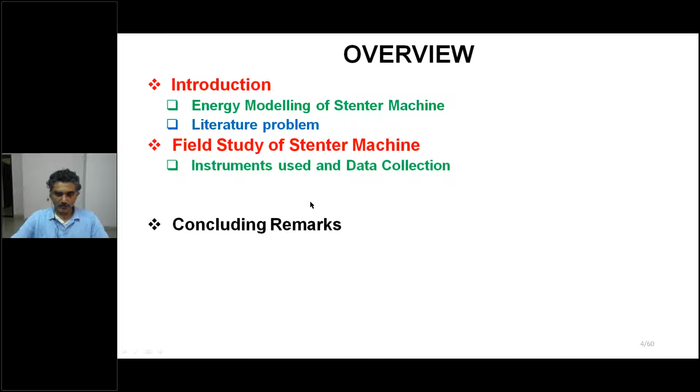Remember here, in the modern era, garments are of one's own preference. Garments is basically not only used as a need, but nowadays it is fashion, and in addition to fashion, it is also a protection in various ways. So garments does not remain just a basic need.

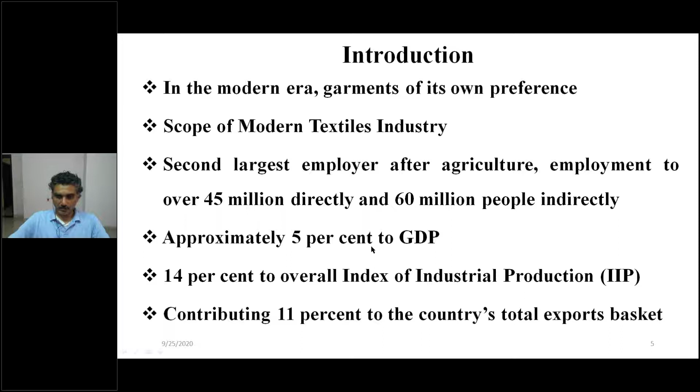Textile industry, if you are talking about as a whole, then in India's concern, it is the second largest employment generation, as well as the second export industry in the world's statistic. So from the economic point of view, also being the second exporter to the world, it is important, as it is said that after agriculture it employs over 45 million directly and 60 million people indirectly, approximately 5% share of GDP, then 14% of the overall index of industrial production, contributing 11% to the country's export.

Surat cluster, if you are talking about, then there are around 450 dyeing and printing units. Drying cost is around 12% of the manufacturing cost.

And if you see the dyeing and printing houses over here, dyeing houses are basically more or less conventional. And being conventional, there are so many issues. To require upgradation requires funding, and being a small scale or medium scale industry, much funding is not available. So there is not much research happening, and upgradation is also not there. And being upgradation is not there, energy consumption is going to be very high.

When we saw these issues, we thought let us try to analyze the energy intensive devices in the textile industry, being that textile industry is an important industry for Surat city as such. Surat is one of the textile clusters in India, basically for man-made fabric.

Man-made fabric is basically manufactured from polymers, which are obtained from crude oil. Ultimately, it is a petroleum product. Then we're going to discuss the energy model based benchmarking for the Stenter.

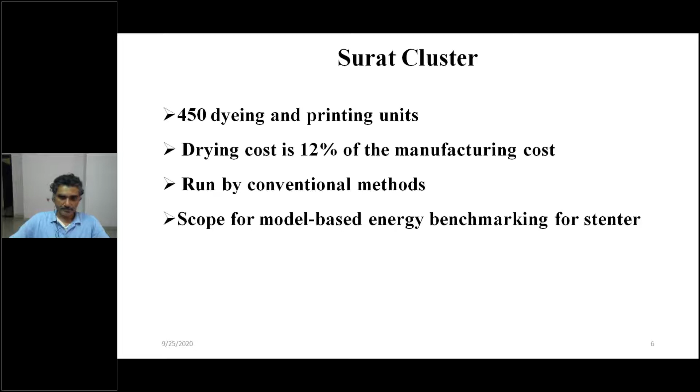Benchmark data available is based on statistical benchmarking in the literature. If you see the data related or given for the Stenter, it is based on the statistical tool. So the drying process, if you are talking about polyester, it varies from 2.5 to 7.5 gigajoule per ton of fabric.

Then heat setting, it is 4 to 9 in the same unit. And drying and heat setting for the Surat cluster is going to be around 0.019 kilowatt hours per meter. So these units are different, and this is basically the average specific energy consumption.

And it is not going to give you the idea whether my Stenter is efficiently working or not, for the particular process, how much amount of energy is really required. If you consider the first case, drying, then energy consumption varies from 2.5 to 7.5. And if the Stenter which I am using in this particular industry has energy consumption of 5 gigajoule per ton, then what can I conclude from it? Whether it is going to be energy efficient, or there is scope for performance improvement, or whatever is going on is according to the best practice I am following. No idea am I going to get from this data, right?

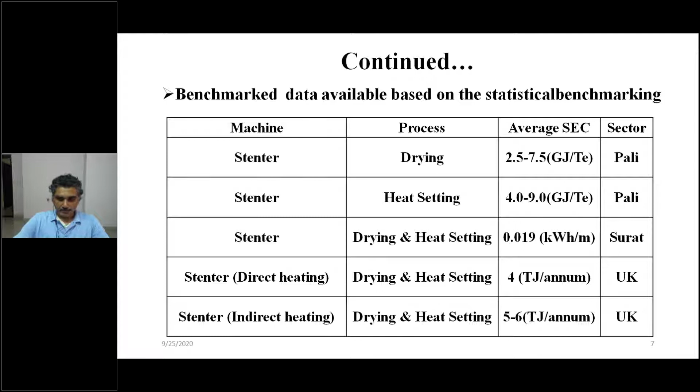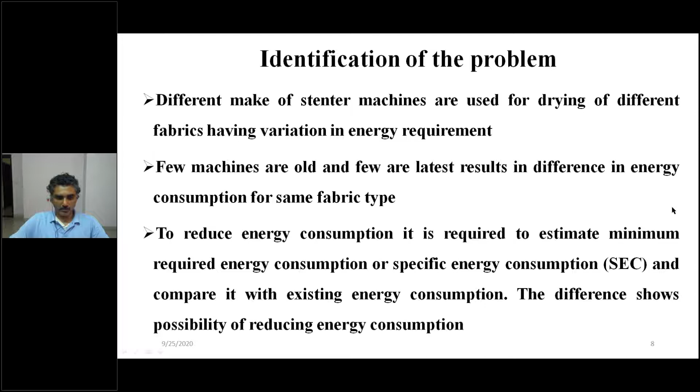So we tried to identify the problems basically in the Stenter machines. Different makes of Stenter machines are used for drying different fabrics, having variation in energy requirement. Few machines are old, few are latest, resulting in differences in energy consumption for the same fabric. To reduce energy consumption, it is required to estimate the minimum required energy consumption, or the specific energy consumption, and compare it with the existing energy consumption. The difference shows the accessibility of the possibility of reducing energy consumption.

Energy input given in the Stenter machine is based on past experience without consideration of the optimal energy requirement to change process and geometric parameters for increase of production or other reasons. Energy optimization is not considered to increase heat transfer to the fabric from the moist hot air, with temperature and fabric speed. Air velocity also plays a key role, so optimization is required.

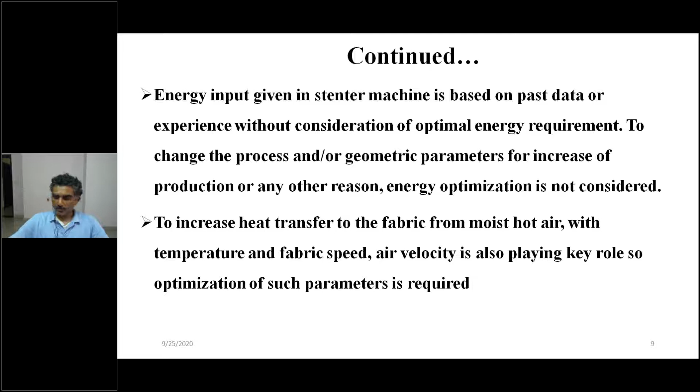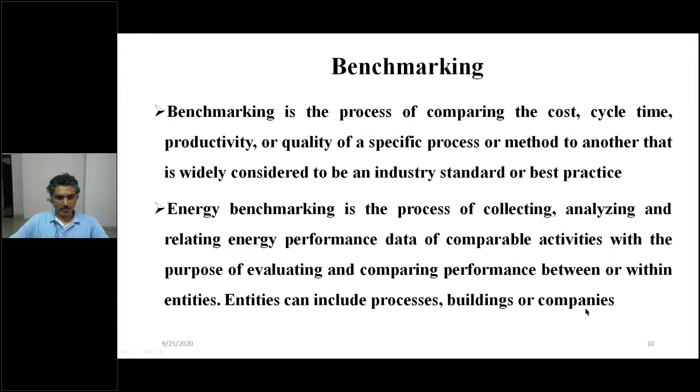We have not addressed all the issues, but we have taken some of them. In this presentation, I am talking mainly on energy model based benchmarking. Energy benchmarking is the process of collecting, analyzing, and relating energy performance data of comparable activities with the purpose of evaluating and comparing performance between or within entities. Entities can include processes, buildings, or companies. This is the broader definition of energy model-based benchmarking.

Energy model-based benchmarking is estimated based on mass and energy balance equations. Remember, the model we are using is based on the laws of thermodynamics, the energy conservation law, and the mass conservation law. Mass conservation law is already something everybody is aware of. Mass is conserved unless there is a nuclear effect. If nuclear effect is not there, then mass is going to be conserved, and similarly energy conservation is also going to happen as per the thermodynamic law.

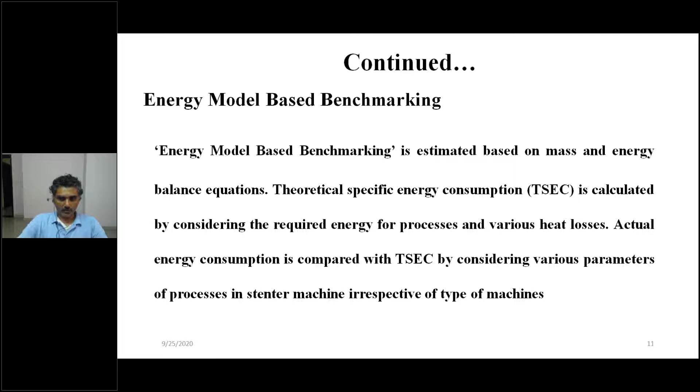Theoretical specific energy consumption is calculated by considering the required energy for the process and various heat losses. Actual energy consumption is compared with the theoretical specific energy consumption by considering various parameters of the process in the Stenter machine, irrespective of the machine.

Before directly going to the Stenter, in this particular case, what I will suggest is I will show you some video related to the Stenter machine, so that you get the idea. Yesterday also you have seen the video, but still I will show it again.

This is the inlet side of the Stenter machine. Hopefully I am audible. Voice is not going to be there as background, so I'm going to tell you the explanation.

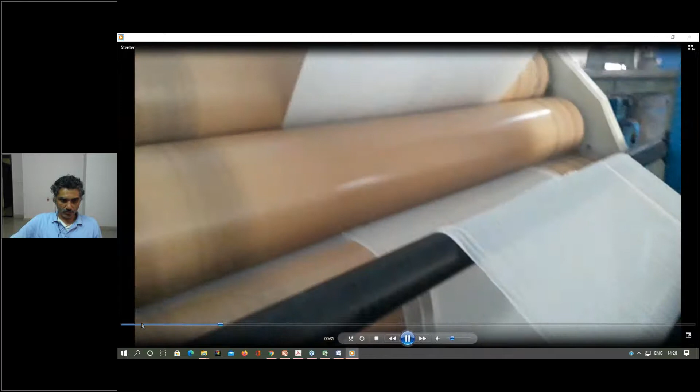This is the inlet side of the Stenter machine. Now it is visible, I think. Okay, it is now visible.

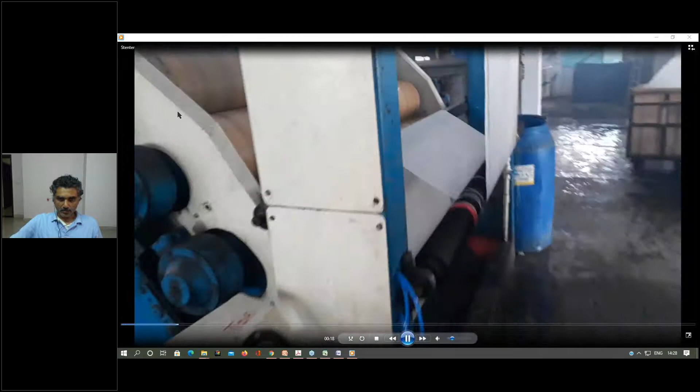This is the mangle. These three mangles are there, and through that the wet fabric is pressed, and some amount of water is removed from it.

This is the rollers, and through that fabric is going to be squeezed to remove the water content, which reduces the load in the Stenter machine.

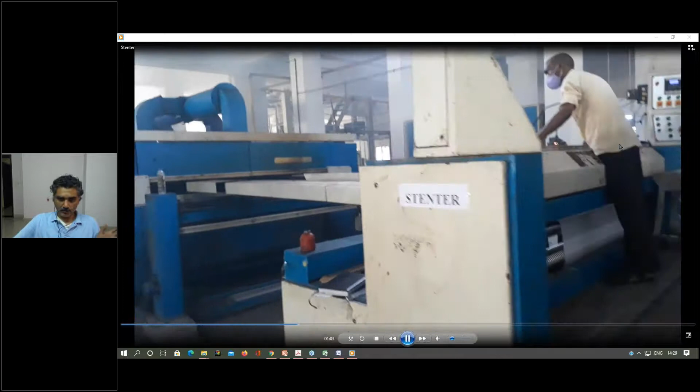Then this is going to be the controlling frame of the Stenter machine. From that, the span of the fabric as well as speed, temperature, and all that is going to be controlled.

These are the control panels on both sides, and at the center there is going to be a feed of the fabric. Fabric is pinned on both sides so that there is no sagging of the fabric, and it is always tried to keep in particular tension to adjust its size.

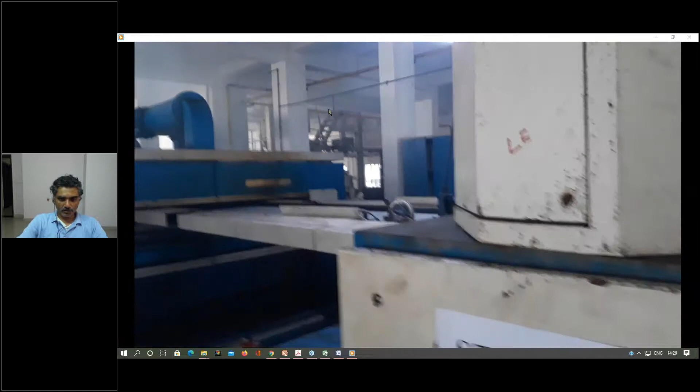Remember, the Stenter is not only used for the drying operation, but it is used for sizing and desizing. Sizing and desizing means the dimensions of the fabric are going to be set in the Stenter machine. You can increase the size of the fabric or reduce the size of the fabric within a permissible limit. Further, after the coloring, for the fixing of the color or dyes, the Stenter machine is also used. So the Stenter machine basically has a lot of applications, and without it, dyeing and printing houses cannot exist. However, it is also an energy consuming device.

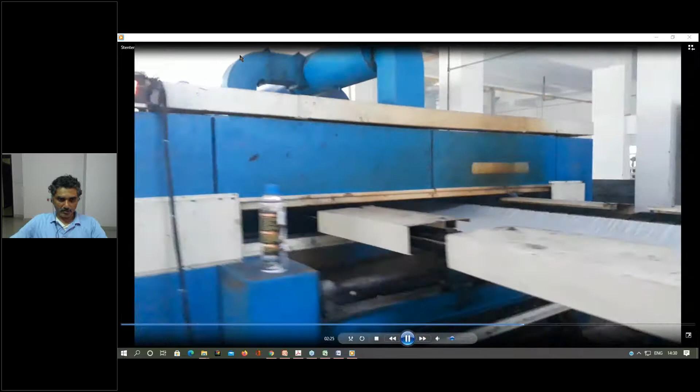This is the inlet of the fabric, and there are going to be a number of chambers depending upon the type of fabric. The chamber consists of a dedicated heat exchanger, a hot oil heat exchanger. We are going to see what is going to be the content in one chamber.

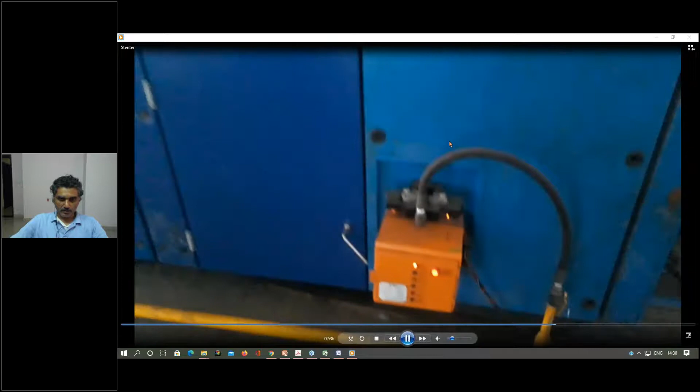This is going to be the motor for the blower, which is used to recirculate the hot air. This is again another electric motor connected to the blower, circulation blowers.

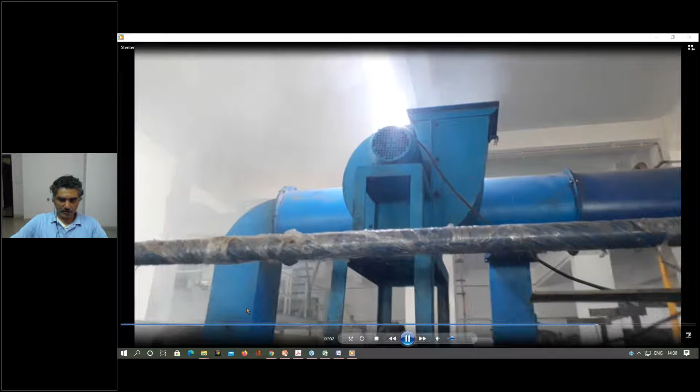The top section contains the ducting system for the exhaust. This is the other end of the fabric through which the fabric is coming out, dried fabric. You can see the fumes of it.

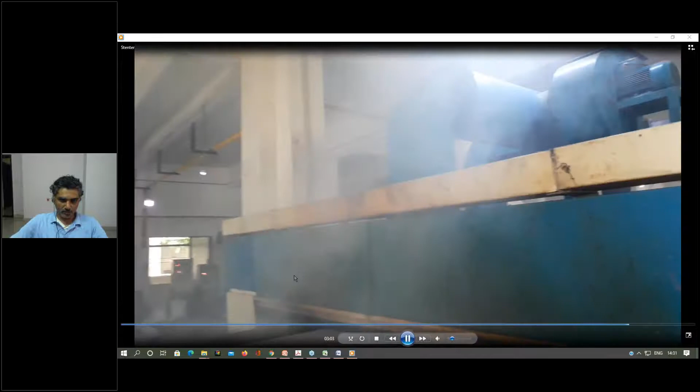This is actually because of the leakage problem over here. The blower locations are not appropriately designed, and because of that fumes are coming out.

Now this fabric is going to be stored appropriately, and then maybe if it is finished, it may go for garmenting, or if coloring is required, then it will go for coloring. So for the Stenter machine, you might have got the idea.

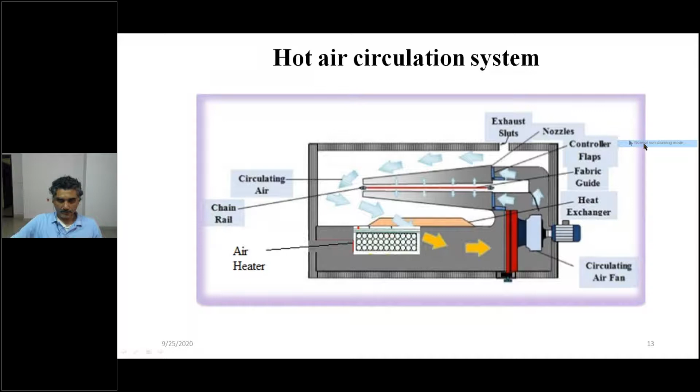Next, we'll move towards the model side. So you got the idea - there are going to be nozzles, this is the fabric part, and an air heater is going to be there. We have divided this section into multiple control volumes, and we are going to apply mass balance and energy balance equations to the entire system, as well as each control volume considered.

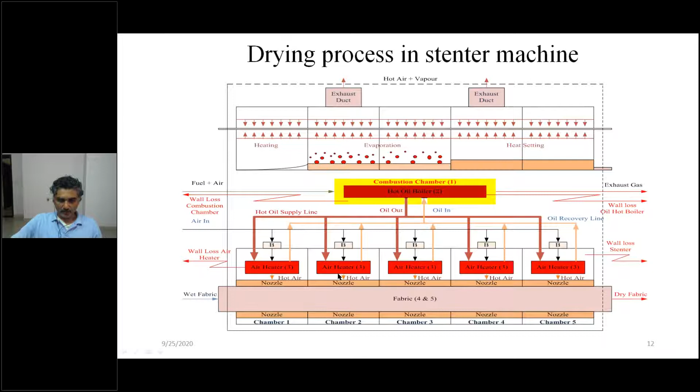From the point of view of analysis, what are the advantages of this, particularly the benchmarking we have discussed? I'm not going much into detail about it.

This model has certain assumptions. The fabric is considered homogeneous along the moisture migration direction, that is the direction of movement of the fabric. The drying process is carried out at steady state, and the temperature, humidity, and other properties of the drying air and fabric are constant with time at a particular location in the stenter.

There are so many other assumptions also. Remember, assumptions which are appropriate and practical will not introduce unnecessary error. Definitely, assuming things moves you away from reality, but if your assumptions are practical enough, the error introduced is not very significant. It is very less, and because of that the results you get are equally applicable from the practical point of view also. So assumptions are not always bad.

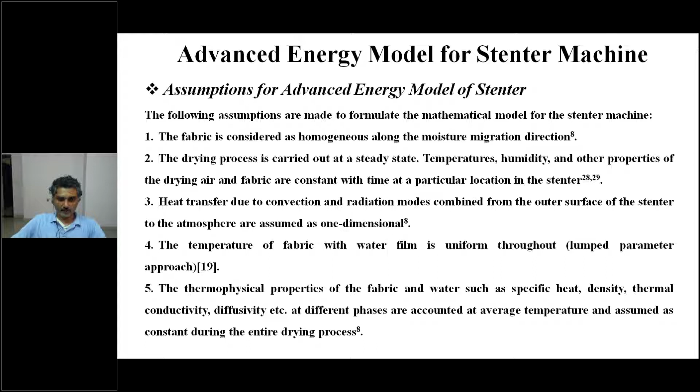Coming towards the model formation: the mass coming in from all the sources equals the mass going out in this particular stenter. There is going to be the inlet of fabric, inlet of air, then inlet of thermal energy, or maybe hot oil.

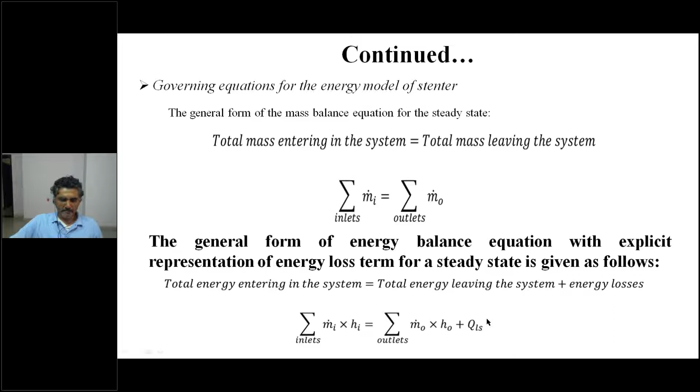The general form of the energy balance equation with explicit representation of the energy loss term for steady state is given as: the mass into the enthalpy of that particular stream equals the mass of the particular stream going out multiplied by the respective enthalpy - energy coming in equals energy going out. This also includes the losses, so Q losses, though we have written it explicitly, that is not required.

Similarly, the process takes place in the second chamber, and so on till the last chamber. Generally, stenter machines range from small, with 3 chambers, to large, with 9 to 10 chambers. 9 to 10 chambers means 40 to 50 meters length. It is actually a very huge device, and a lot of noise comes from it - normal people cannot stand over there.

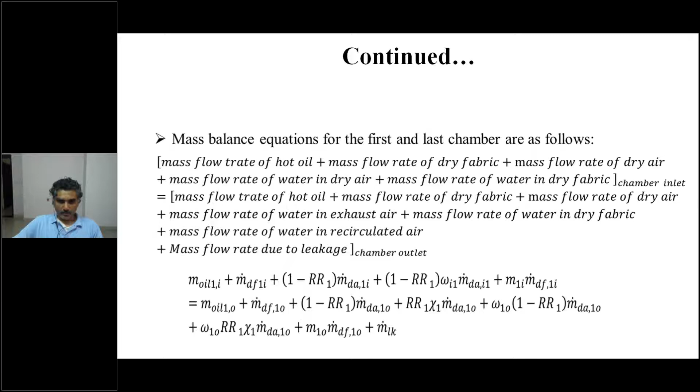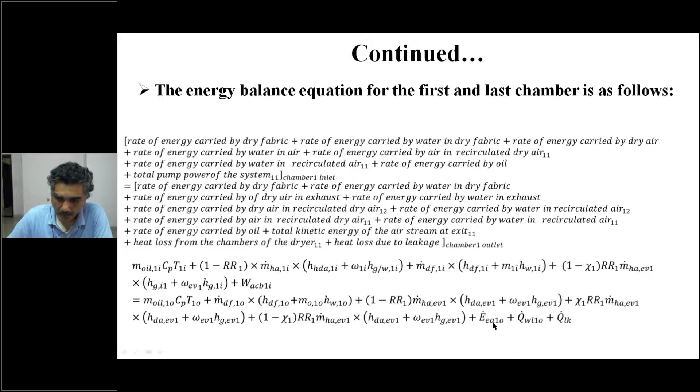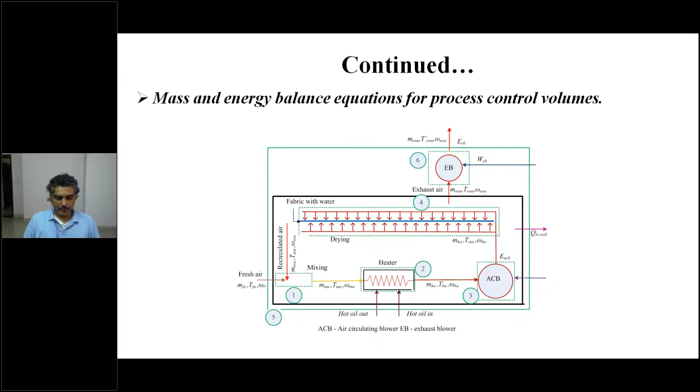We have the mass and energy balance, one each equation. So with 6 control volumes, we are going to have mainly 6 into 2, that is 12 mass balance and energy balance equations. With that we have certain property data and all that. So combining all that, we are getting a mathematical model of the Stenter machine.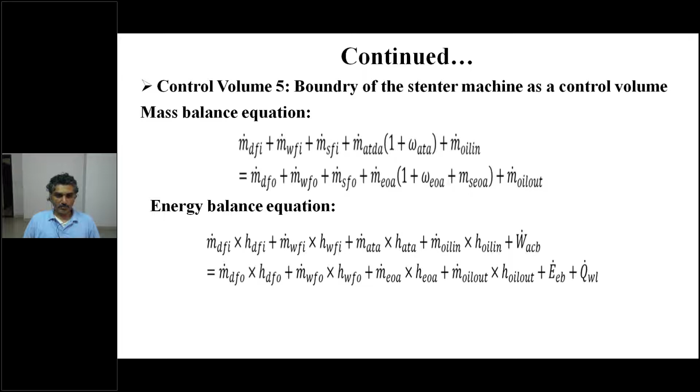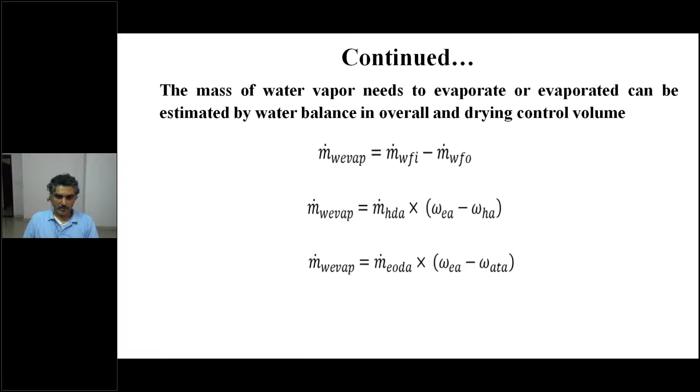This is the property relations derived, which is used in this case. This is a similar case. We are calculating how much energy is required for the evaporation.

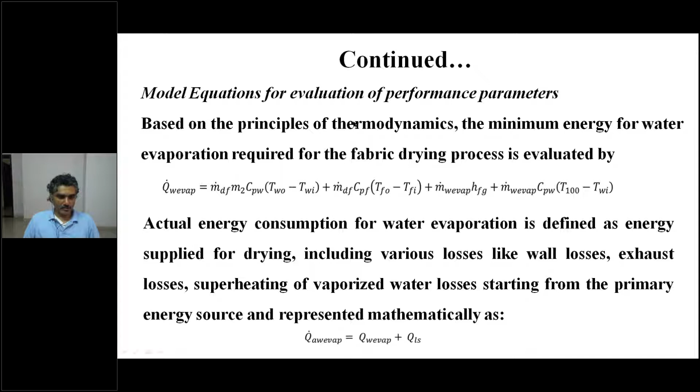From this, we can analyze the equations and determine the energy required in the Stenter machine. And specific energy consumption is one of the parameters which we are using. Specific energy consumption is nothing but the energy consumption or energy required per unit some quantity, and that quantity can be taken out as per your analysis.

In this case, we have considered per kg of water evaporated, and another we have considered per kg of fabric also, but per kg of water evaporated is going to have good representation, and it is going to be comparing two processes because of the common scale. It is going to be easy.

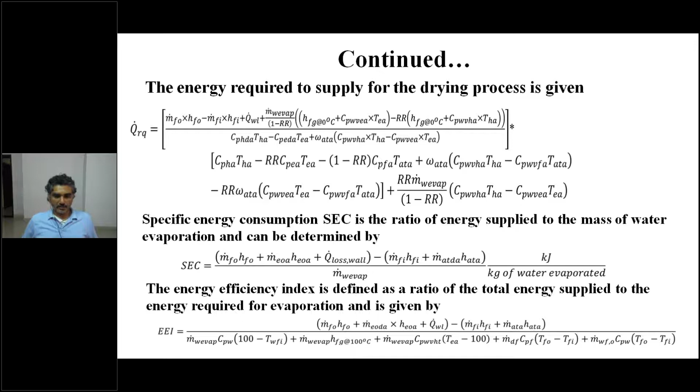The next performance indicator we are using is the energy efficiency index, which is very important. Remember here, the value of the energy efficiency index 1 is best, and as the number increases, the performance of the Stenter machine deteriorates. Expected value is going to be around 1.5. If it is going to be higher than that, then we can say that the energy improvement scope is present, and we can go for the energy audit.

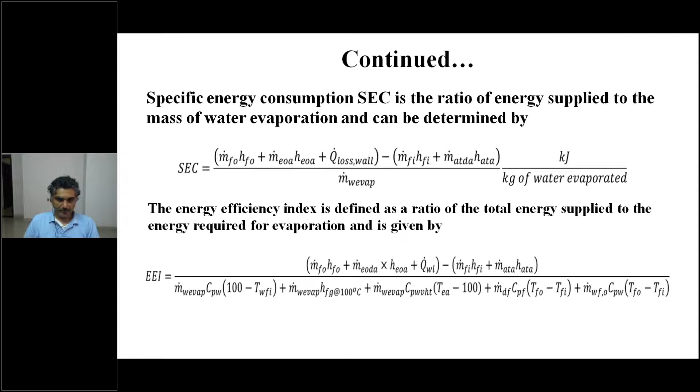After the performance parameters, here we are talking about the representation of energy consumption for the Stenter machine. Remember, this is considered as the energy at inlet. The hot oil energy coming in is around 4 to 6%. The maximum energy is recirculated back into the Stenter machine by the recirculation blower. The atmosphere carries some energy, but this is not useful since it has no potential. The fabric also comes in with certain energy, and this is the energy present at the inlet of the Stenter.

Now let's discuss how energy losses take place. There are other losses in the Stenter, and 1 to 4% are exhaust losses. Dry fabric has losses too, with energy in the fabric containing around 0.2 to 0.4%, and recirculation energy is from 93 to 96%. Remember, the Stenter machine operates at a very high recirculation ratio, around 99%, and because of that the recirculation ratio is quite high. 93 to 96% recirculation is what we obtain in this particular case.

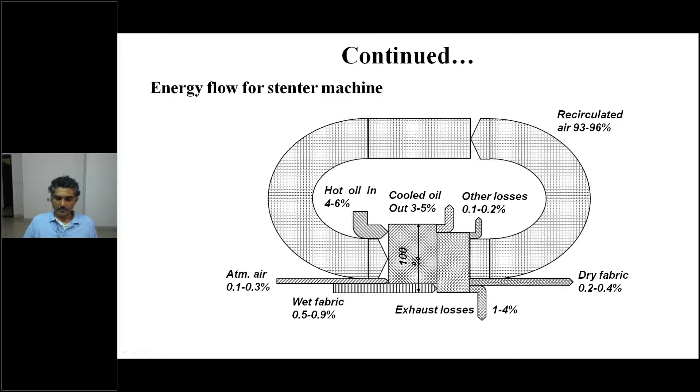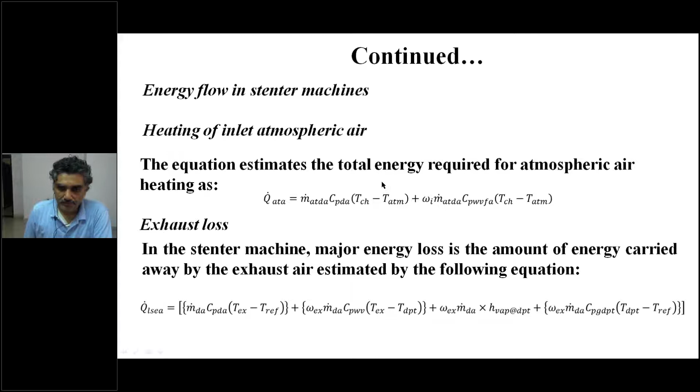So after the energy flow in the Stenter machine, there's heating of the inlet atmosphere, and that is not required here. Exhaust losses, which we have already told you about, we have tried to determine. I will go through a literature example.

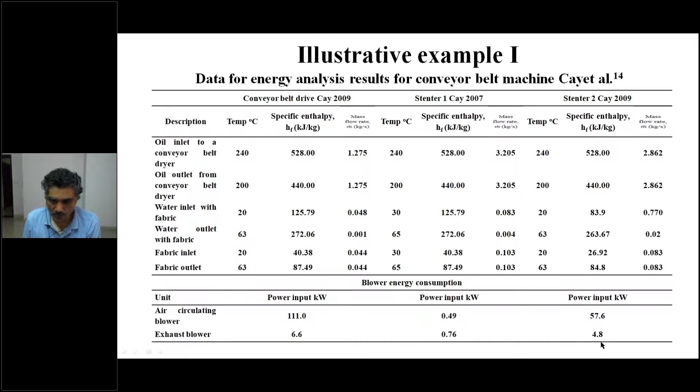The blower also consumes a lot of energy. The air circulating blower consumes around 60 kilowatts of energy, and the exhaust blower requires 5 kilowatts of energy.

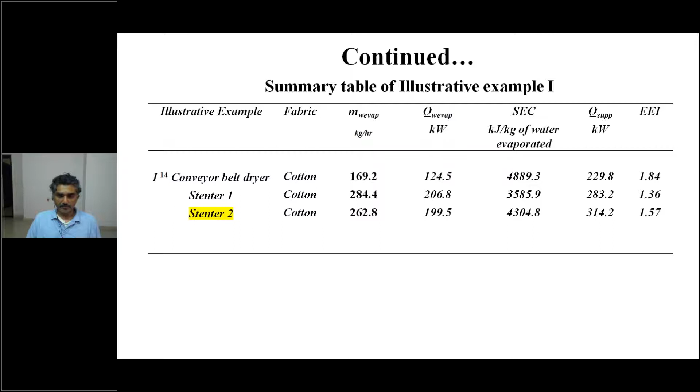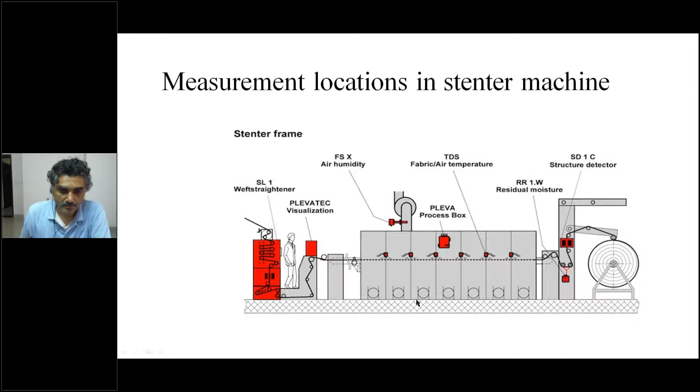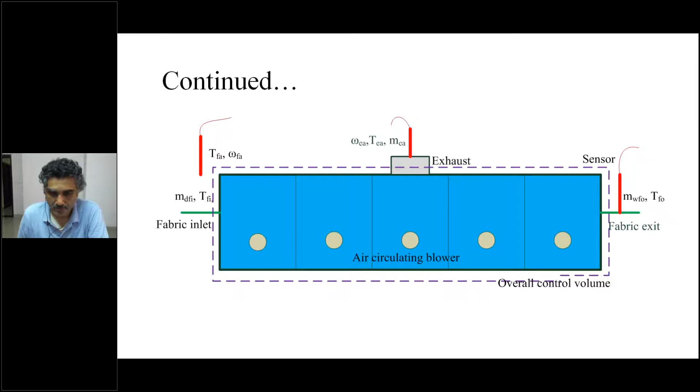Now, these are the instruments which we have used. Moisture content at the exit of the fabric - we are trying to measure inlet and outlet moistures in the fabric. For that, we are taking out samples, and in the laboratory setup you have seen the facility available there. They are cutting the sample appropriately to measure the GSM, grams per square meter, which is one of the important units from the point of view of the weight of the fabric. So the inlet and outlet moisture from the weight of the fabric can also be calculated and determined, but precision weighing balance is required for it.

Then for air circulating power, we have a power quality analyzer that is used for the appropriate purpose. Then power exhaust blower, atmospheric temperature and humidity measurement can be appropriately carried out. Then wall temperatures can be used to determine the wall heat transfer from the Stenter machine.

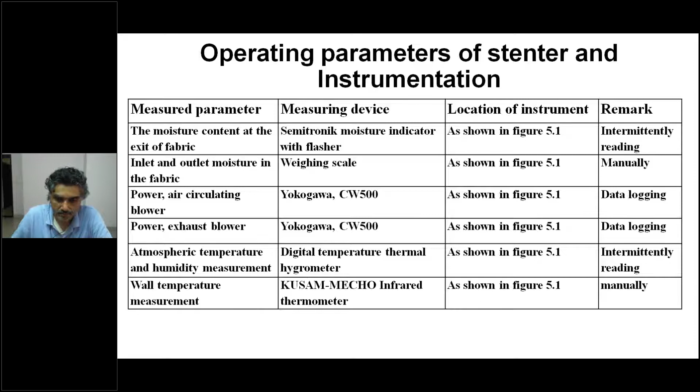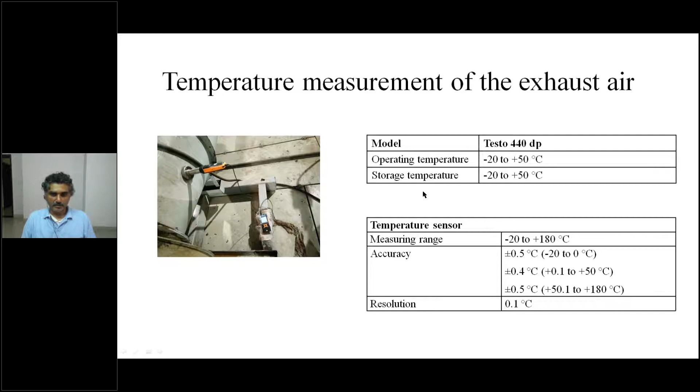So the list is going on. A few instrument photographs are shown over here with their specifications and how they are mounted in the Stenter.

These are the samples collected to measure the GSM of the fabric. Remember here, the higher the GSM, the thicker the fabric and heavier it is going to be. The thinner the fabric, the lower the GSM. So per meter square, what is the weight of the fabric is going to be given by the GSM of the fabric.

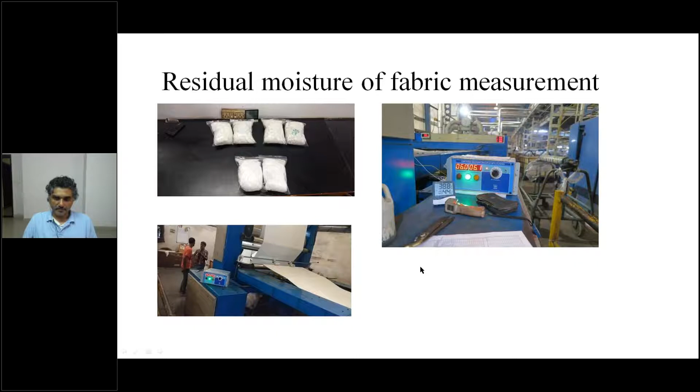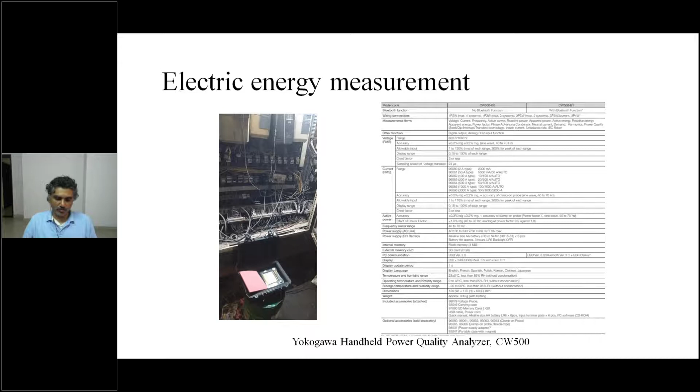So these show the outlet moisture content in the Stenter machine, shown by this particular device. This is measuring the room temperature, humidity and moisture temperature. This is the screen of the Stenter machine control system. This is something related to the energy measurement - a power analyzer which is available with MANTRA, used for recording and analyzing the data related to power.

Okay, with this I come to the end of the field study. Then whatever data we have used, we put it together in an appropriate way, and we wanted to analyze it.

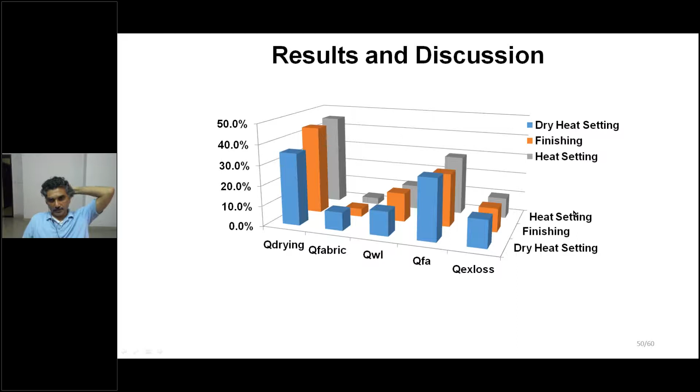If you compare over here, dry heat setting basically requires a larger amount of energy. The energy losses in that case are going to be higher because of higher temperature. Finishing has minimum energy losses. And heat setting is in between finishing and dry heat setting.

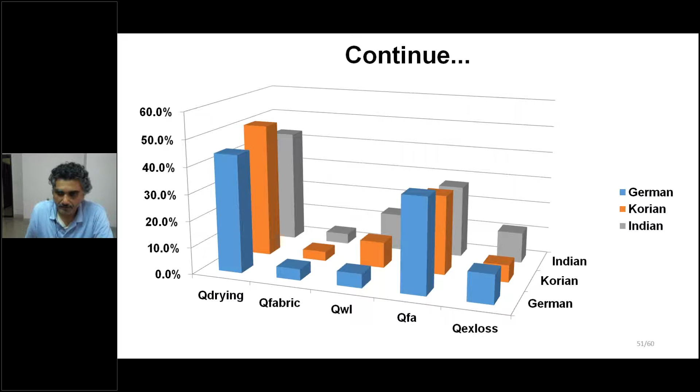And that is one of the reasons why the Indian Stenters used in dyeing and printing processes are inefficient. So to keep this at around 0.1 moisture requires an automatic control system, which is missing.

So this is one of the important conclusions we are drawing from our study. We are saying most of the Stenters are not operated at optimal condition. Whatever may be the reason, the operator may not be skilled, or the system may not be possible to run, or maybe they want a high production rate.

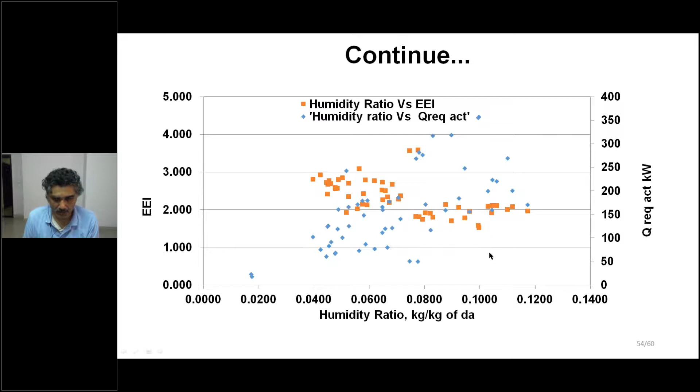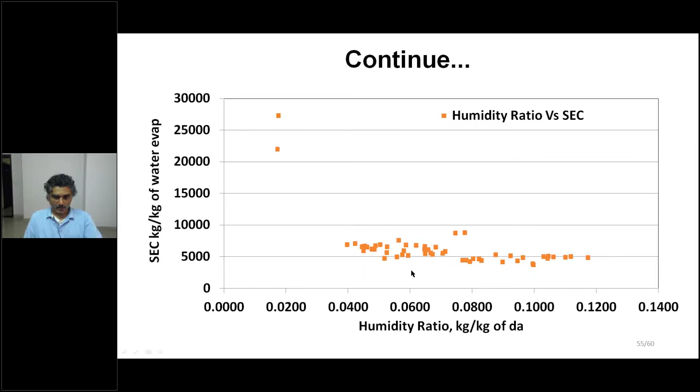So the economic operation range of the Stenter machine is this, and the Stenter machine has to be run in that particular range. Most of the operation in the Indian scenario is carried out in the not economical zone, but somewhere operation problems are also there.

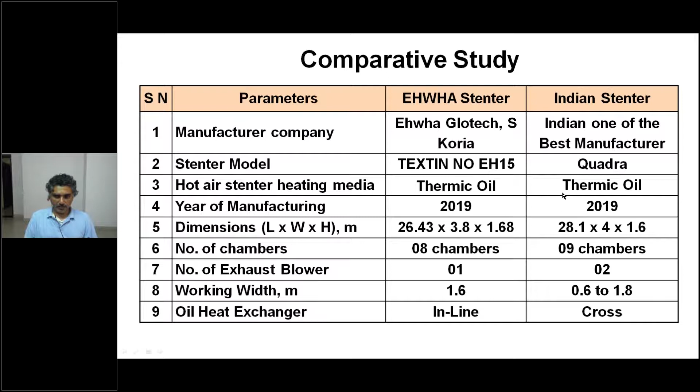We have carried out a special study comparing an Ehwha Stenter with an Indian Stenter. We cannot display the Indian manufacturer's name because of our agreement with them, but the Stenter machine taken from the Indian manufacturer is also a good one among the manufacturers. By comparing them, we will come to know where the possibility of improvement is.

In the Indian Stenter there is going to be one more chamber. If I remember rightly, the Indian Stenter number of chambers is going to be 9, and the Ehwha is going to have 8 chambers.

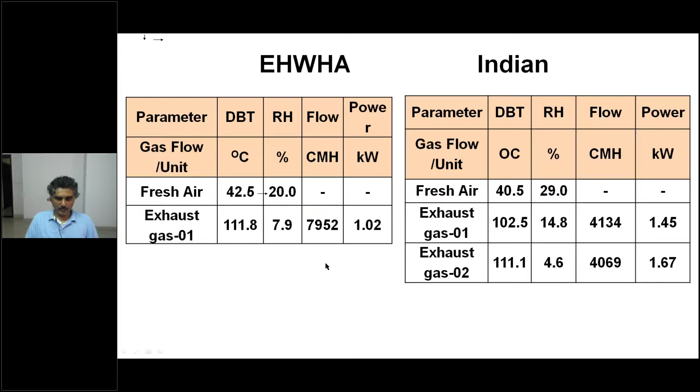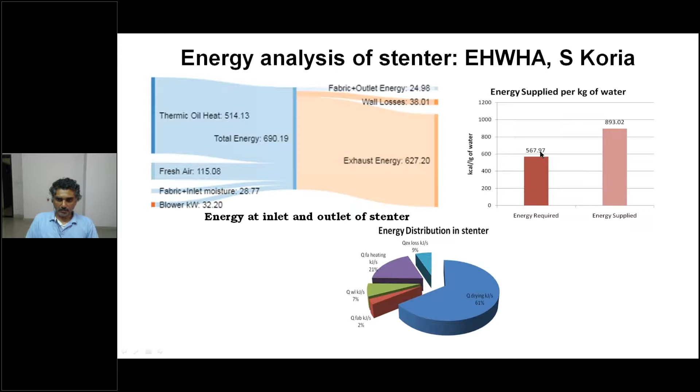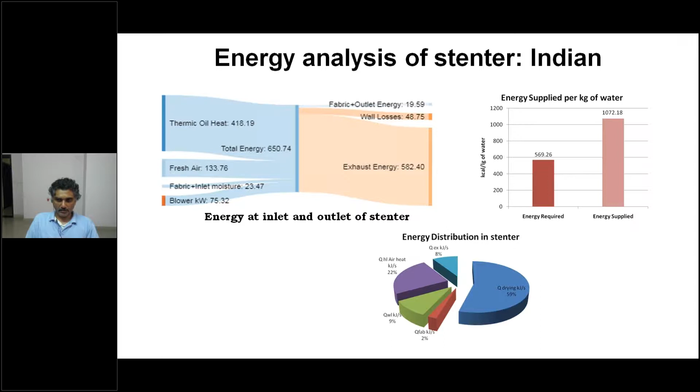This is another way of showing the energy distribution. This is the same data graphically represented for the Indian Stenter. The energy required is 570. Here, energy required is also around 570, but supplied energy is going to be 1072. On the other hand, here supplied energy is going to be just 900. So from the energy consumption point of view, we are lacking in so many places, and that is what we wanted to analyze.

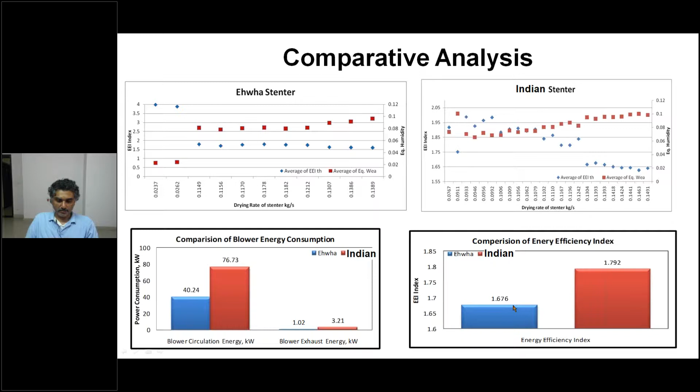Now I'm just on the side of closing my presentation.

Overall conclusions in this particular case: if you are talking about the energy requirement in the Ehwha Stenter, it is going to be a little bit higher than the Indian one, but the energy supplied is going to be higher in the Indian Stenter than the Ehwha.

Similarly, the specific energy consumption per kg of water is lower for the Ehwha Stenter than the Indian Stenter. The energy utilization is also higher in the Ehwha Stenter than the Indian Stenter.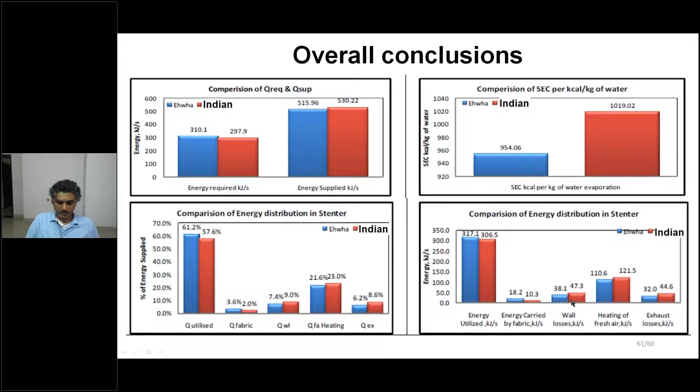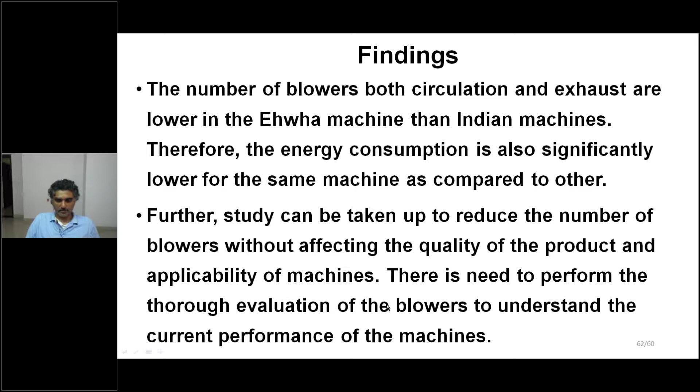The number of blowers, both circulation and exhaust, are lower in a Ehwha machine than the Indian machines. Therefore, the energy consumption is also significantly lower for the same machine as compared to others. Further study can be taken up to reduce the number of blowers without affecting the quality of the product and applicability of the machines. There is need to perform a thorough evaluation of blowers to understand the current scenario of the machine, so CFD work can be taken up appropriately.

The wall losses per unit area for Ehwha machines are lower, even though the hot air temperature is higher. The hot air supplied for the Ehwha Stenter is 150 against 130 for the Indian Stenter. This indicates that there is scope to reduce the wall losses in the Indian Stenter machine.

For this current case, insulation material and thickness can also be analyzed, and based on that it will be decided whether to change the material or increase the thickness of the insulating material. So to appropriately reduce the heat losses from the wall, the insulation can be changed, or the thickness of the insulation can be increased. This needs to be appropriately decided based on the cost.

The exhaust losses can be further reduced in the Indian Stenter by adjusting the exhaust blower gas flow rate appropriately in the optimal range, by adjusting the exhaust gas humidity in the range of 0.1 to 0.15, which I already discussed.

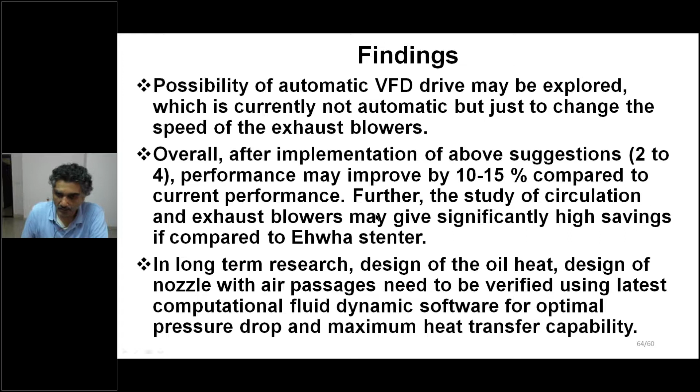Overall, after implementation of above suggestions 2 to 4, performance may be improved by 10 to 15% compared to the current performance. Further, the study of circulation and exhaust blowers may give significantly high savings if compared to Ehwha Stenter. In long-term research decisions, design of the oil heater and design of nozzle with air passages need to be verified using latest computational fluid dynamics software for optimal pressure drop and maximum heat transfer capability.

So the overall remark I wanted to put is, if you are talking about any device, first of all very closely observe the system, try to make a sketch out of it. Then based on the fundamental law, you are able to formulate the mathematical model of it, and that mathematical model can be analyzed and some results can be produced. Those results can be appropriately discussed and justified. So the discussion of the results is one of the important aspects which needs to be carried out.

So energy benchmarking is one of the proven tools we can say for the industry to save energy, and it has to be used in so many places.